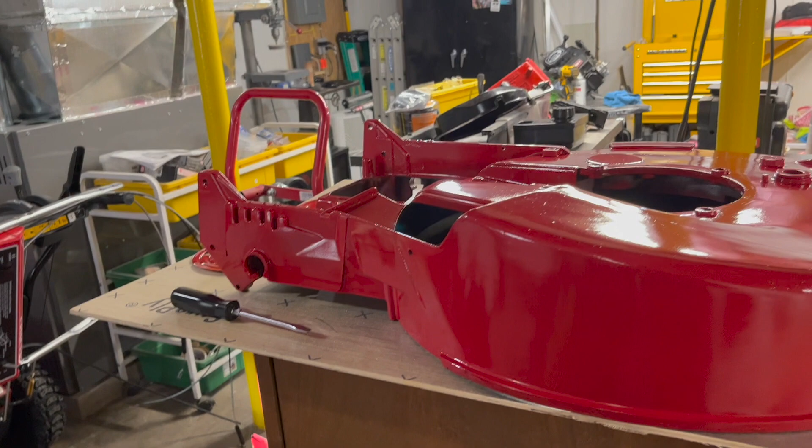Welcome back, everyone. So what we're going to be doing is, in this video, I'm going to be recording this over a couple of different days, and we'll be progressing little by little. At this point, every part needed either has already arrived or is on its way.

We've already painted the deck. Again, I used a product called SEM, a self-etching primer which comes in flat black, and that gave us a really nice bonding layer for the Rust-Oleum. Is it Carmine red I used, or is it something else? Let's see. But it's a pretty good approximation of the original Toro red.

It's called Sunrise Red, and that Sunrise Red I used on all the metal parts that were painted red from the factory. One thing I did a little differently is this belt cover - somebody had used it to put their foot on rather than on the step pad for starting the engine. What that's done is worn it heavily and scratched the shit out of it. So I painted it with a metallic plastic paint, and I'm not happy with the finish. I'm going to repaint this, but I have to sand it smooth again, and then we're going to paint it with a different color.

So this was originally red. I actually looked up to try to find another one of these that isn't scratched like this, but it must be a common problem with this mower - people use this as a step rather than right here, which is what this is for. So, hey, whatever.

In the meantime, I have the blade clutch bearing right here, and I'm considering replacing the bearing. It comes as an assembly, and this assembly is $80, but this bearing is still good. What I want to do is inject some fresh grease into it, just because I think it couldn't hurt.

So what we're gonna do is I got myself a needle for my grease gun - it's an injection needle. You just attach this to any standard grease gun, and you can inject grease into sealed bearings. It's sharp, a hypodermic style needle, and it can be dangerous.

So what I'm going to do is set up the camera here, and we're going to inject just a little bit of all-purpose lithium grease into this bearing. So let me find my grease gun - I think I had it set out right here. I'm going to pump some grease through it to make sure it can actually work, and make sure we're injecting clean grease and not some contaminated shit.

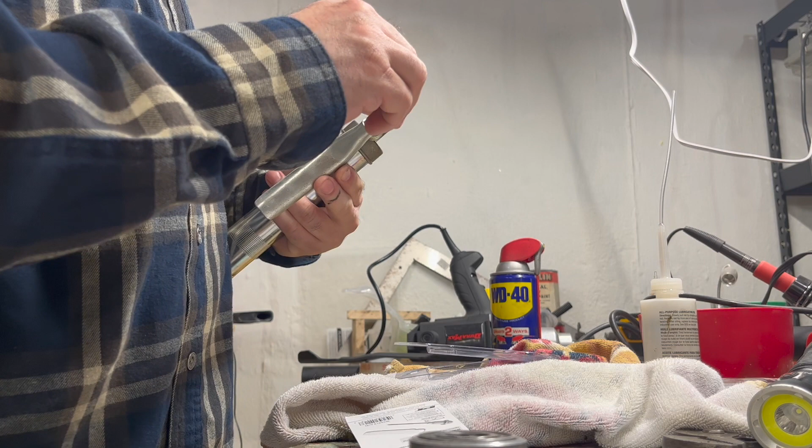Okay, yeah, that works. So we're going to affix this to the nipple, tighten that down, and we're going to take this and inject it right between the seal and the bearing inner race, just like that. And we're going to just pump a little bit of grease in there.

So this bearing is still good. I kind of want to keep it that way because I don't want to have to replace it. Once a sealed bearing starts to get rough, once it starts to otherwise develop problems, you can't save it - it's done for. But look at that, tightens it up nice. And after a few revolutions, that will spread throughout the bearing.

Now we got to do the inner one. There's two of them - two sealed bearings here. Just... why this part costs so much. We're just going to inject it in a few spots, and like I said, that's going to replace or replenish the grease.

Is this cartridge really empty already? That can't be. Almost.

Now, we could save this bearing, but I'd rather not, because I bought the entire assembly for $15. So there's no point in saving that one. Whereas this one cost $80 and the bearing is still good. So like I said, we just injected a little bit of grease into it to rejuvenate it a little bit. Ideally, we would take it apart and repack it, but I'd rather not do that. So I think we're good here. And after a few hours of use, this thing will be fully and totally rejuvenated.

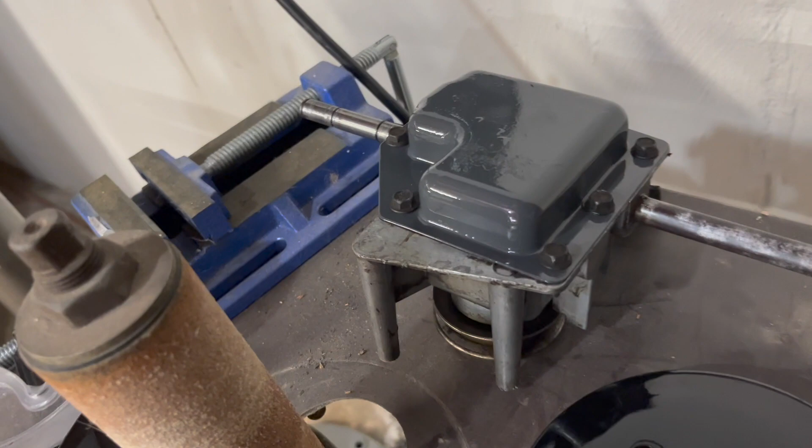Now we got to take the engine apart. We're going to take the top end off, and we're going to take the flywheel shroud off and the starter. But here's how the transmission looks. It's been repacked with grease. I put way too much grease in it, but that's what the unit looks like, all nice and assembled. But I really packed it in. It was making a lot of noise when you move the mower back and forth. So I figured it was probably due for some lubricant. So now we need to take the engine shroud off.

All right, we're digging in there. And we still got a lot of crap in here. To get to the crankcase breather, we got to pull the flywheel off. And this cup is full of stuff. But we have to get that hose replaced. There's no way around that. From what I understand, this all has to come apart. This is all coming from the crankcase breather.

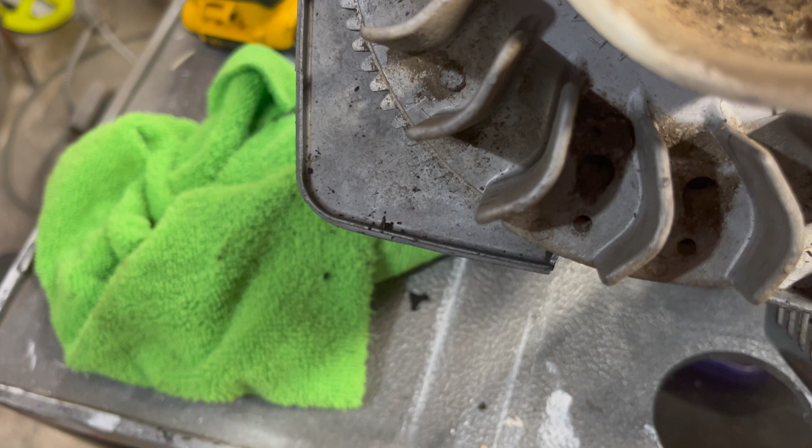But it looks like some of it could be from, it could be one or the other, or all of the above. So I need to verify the direction. I think this is counterclockwise. No, clockwise to remove and counterclockwise to install. And you can't really see much of the exposed thread, so I'll have to look that up and see what it's going to take. But I have that impact here I could use to get that off.

What a fucking mess. Look at all that oil that just dripped everywhere. It's just absolutely everywhere. So what's happening is the flywheel is blowing air down this way. So it's blowing oil and everything else down this way. It's just making a mess. So we gotta come up with a way to get this done.

Okay, I removed the flywheel nut. It is standard lefty loosey, righty tighty. That didn't put up a fight. Now I just need to get this flywheel off. To do that, I'm going to use a mallet and the closest thing I have to a breaker bar. I've been doing it like this for my entire life. I don't have my mallet in here, but I'll use this.

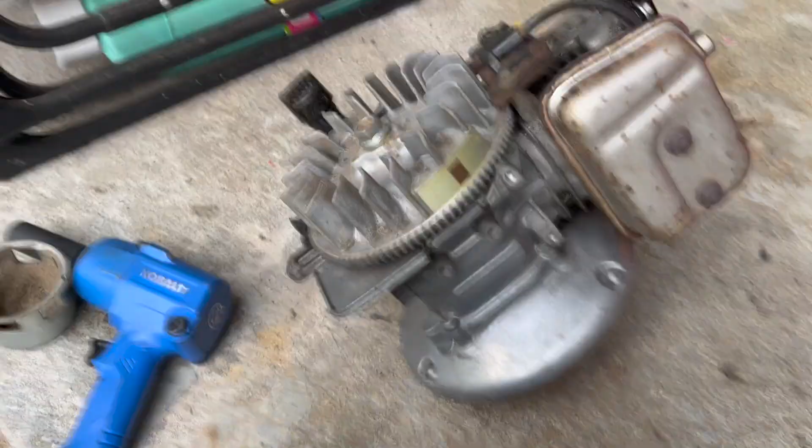So what we're going to do, we're going to put the nut back on to protect the threads. Okay, just like that. And we're gonna give it a good swift kick in the ass. So what I gotta do is put some pressure under the flywheel without breaking anything. This is an aluminum material, so we don't want to break anything. I'll put it over here. This usually pops them right off.

So I don't have a tripod for this phone, so bear with me guys. Here we go.

Just really break it free. It's easier when the motor's on the deck. Easier when the motor's on the deck, but we don't have that luxury, so yeah, this one's a little trickier because I don't want to break anything. I can see aluminum bending and I don't like that. There's gotta be a better way.

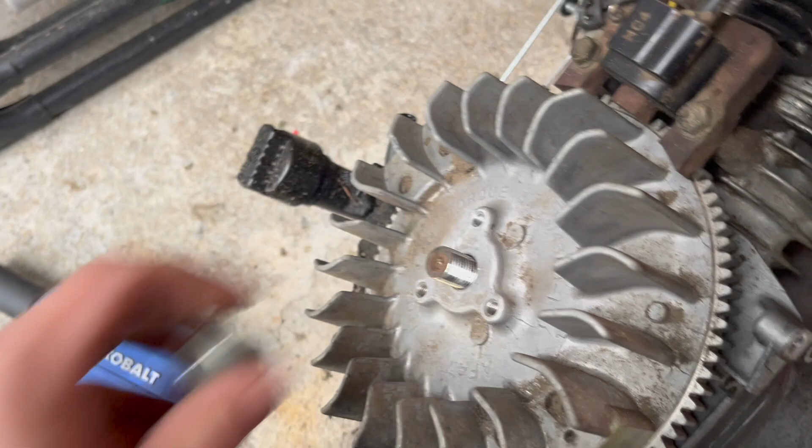Normally they don't take this much effort to remove, but maybe if I do it this way. All right, just took a few more taps, but we were on the right track, so we got it off. Oh, I gotta take this off, but we're there. Let's bring it down to the basement and finish the job.

So let's take a look. Yeah, you don't want to put so much pressure that this starts bending. You got to be very careful. It's not the funnest job in the world, but somebody's got to do it, right?

Now this just means that we're going to have to make sure we gap this correctly. I do have the... You know what I used to use as a kid, and this was taught to me by a long-time lawnmower mechanic. I would use a dollar bill to gap the magneto to the flywheel magnet. And it works every time.

So here is our crankcase breather. So that's where we got to really focus some of our attention. Oh yeah, this motor fits right in this little pocket. There's a wire thingy there. Anyway, so this is our crankcase breather. Look at how dirty this is. We're going to clean all this up. I'm going to get some of that foamy engine cleaner shit.

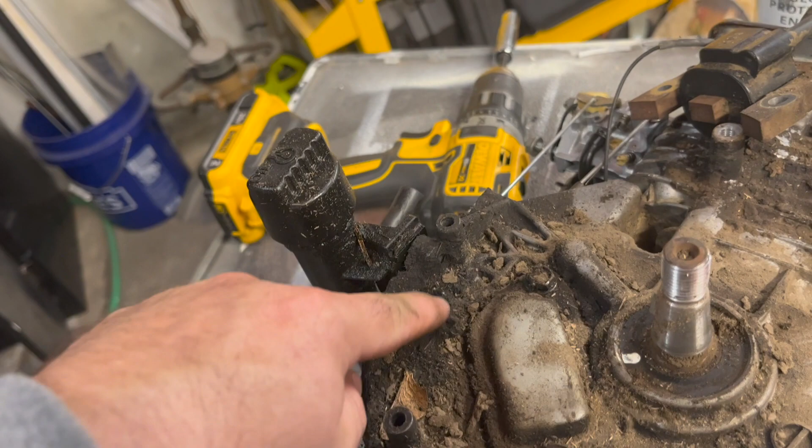And it looks like our upper seal might be leaking. But if you do the forensics here, it looks like a lot of this oil is actually coming down from here and then dripping down. But I do need to change out this hose, so I have to take this apart anyway. So it's not a waste of time for sure. Okay.

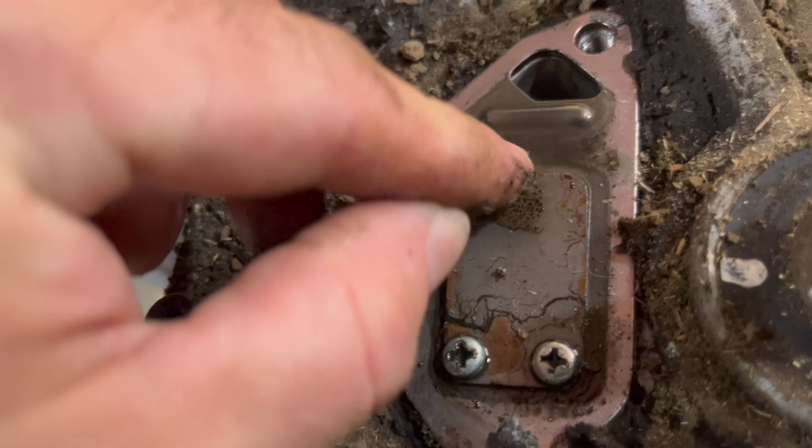Let's see what horrors lie under here. That looks really bad. Yeah, I'm gonna have to get more parts cleaner. This is just not acceptable. Okay. All right. Looks like there's a, yeah. Okay, I see where that hose goes. Let me clean some of this off first before I get any of this into the engine. So that goes straight into the crankcase. Don't let anything in there.

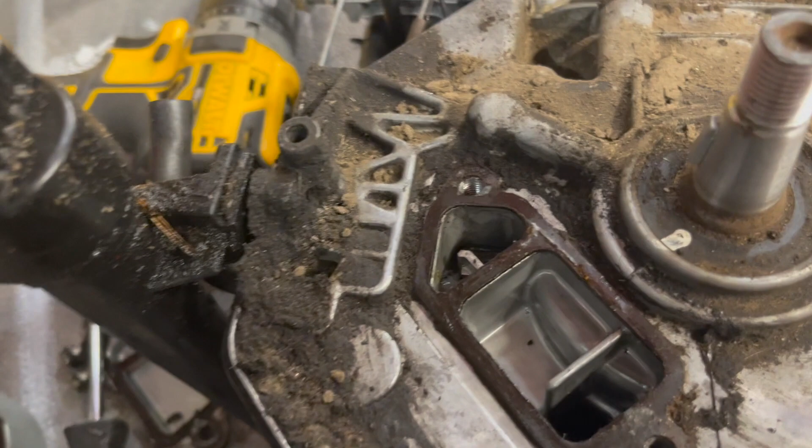This is another cork gasket. I'm gonna have to find a way to make a new one of those. Now that's actually a fiber gasket, but a very thick one. We're gonna have to reuse it, I guess. So here's our hose. I'm gonna pull this hose out. Somehow. Looks like it's swollen in there.

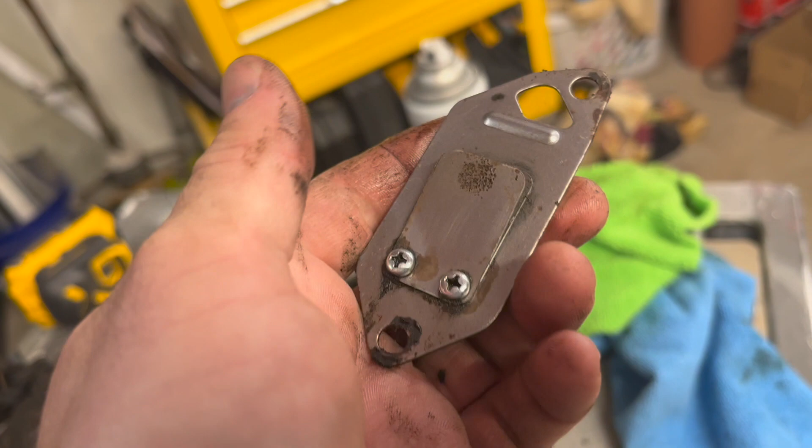But oil is getting into here. You can see there's a lot of oil in there and it's dripping around the hose. So we've got oil from multiple sources here. Here's the opposite cover. So it's got this little reed valve in there. We'll have to clean this off. So positive pressure is supposed to allow air to come out under that cover and into the breather, but it's allowing too much oil.

So what we're going to do is we're going to pack this with steel wool. I'm going to take a wad of it and stuff it in there. That's going to help hold some of that oil back. As for the hose, she don't want to come out. We need to replace this hose. It's done for.

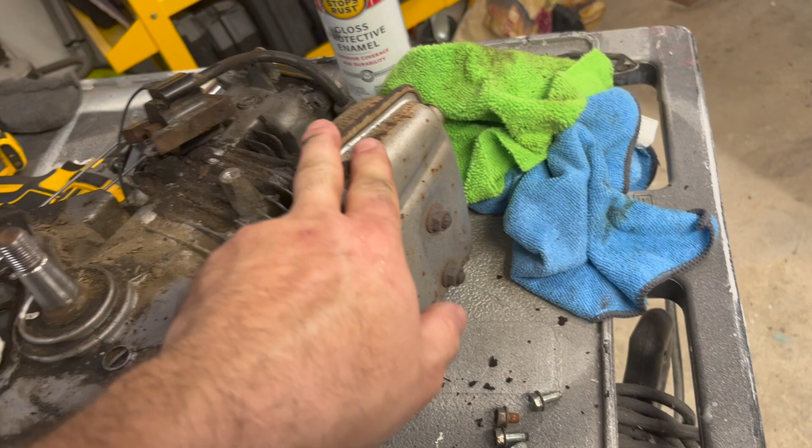All right, I just found a muffler gasket. Those were discontinued from the manufacturer. So when that comes in, I'll take the muffler off. We'll put it in Evapo-Rust, get the rust off of it. We're going to repaint the muffler black or whatever high heat paint I have.

The crankcase breather hose is no longer available, cannot be found. It is a special bespoke hose and it is full of oil. So here's our best bet. We need to stop the influx of oil somehow or slow it down. So here's my plan. I'm going to clean this up and we're gonna put some mesh in there, which is going to be in the form of steel wool.

And I've got some of the heavier grit stuff. This is what we're going to use, and that will slow down the flow of oil. Try to keep it from blasting out of there. So we've got a combination of factors causing oil everywhere: overfilling the crankcase, not being careful when putting oil in the tube and spilling it everywhere. We've got an oil cap that doesn't seal anymore, and we've got a poorly designed crankcase breather.

A lot of factors. Now we also have a possible bad engine seal here on the top, but I'm going to start with the cheapest stuff first, and then we'll escalate it. If we have to pull the flywheel off again and do the flywheel or the upper crankshaft seal, we'll do that at a later date.

I do need to do some cleanup here really bad. Once I get this cover off, I'm going to scrape away what I can, just kind of pick it off like an archaeologist. Yes. So because I can't get these gaskets anymore, I'm going to reuse the old ones, and I'm just going to seal them with RTV. It's really the only thing I can do at this point.

All right, so we're going to stuff some steel wool in there. And you're thinking, well, you think you're smart. Well, I do. But I try to think of things that may not be on the minds of everyone. Yes, it's possible that a few fibers could get sucked into the engine, but it's also possible and more likely that the steel wool could be blown into this reed valve and keep it from closing properly, right? That's a possibility, ain't it? Well, I thought about that.

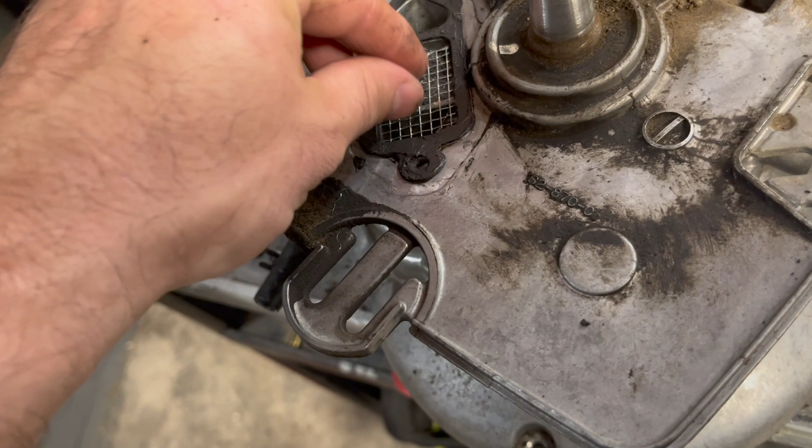So I cut a piece of hardware cloth to sit right on top of this, to sit right on top here. And that hardware cloth is going to prevent the steel wool from getting blown up into the valve, in theory. That's my theory anyway. We don't want anything down in this channel. The oil should be able to drain back into the engine.

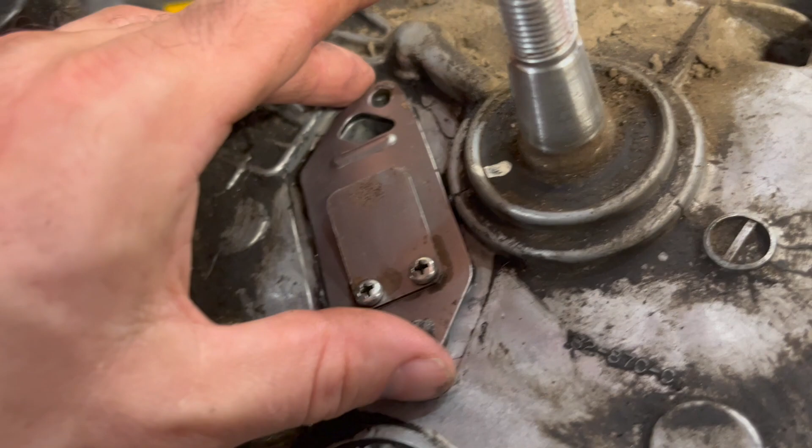This is how a lot of these PCV valve systems work in motor scooters. I've seen a very similar idea used in those. But the system that they implemented doesn't work very well to keep the oil out of the airbox. So consequently, oil gets everywhere. Everywhere we don't want it. So I'm hoping that my little hack here works.

So the hardware cloth is to prevent, during intake stroke, or when the piston is being drawn into the crankcase, that steel wool ball from getting shoved into the reed valve, which would cause some problems. So what do you think? Think it'll work?

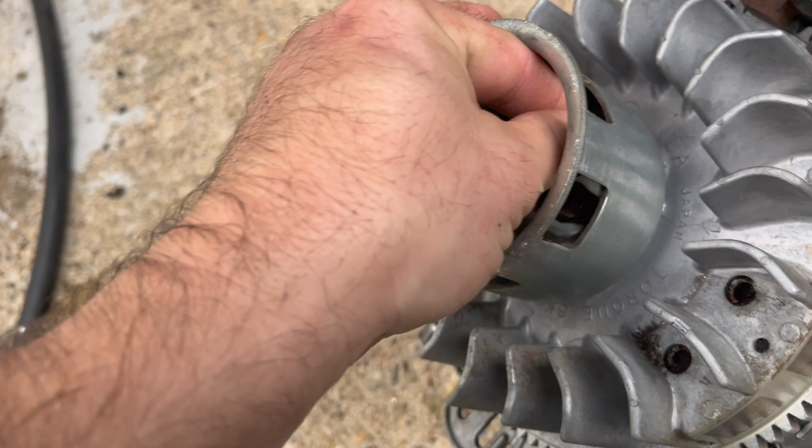All right, so we cleaned this up. I just used compressed air and a wire brush and just blew all the crap out. Anyway, so we got to get this cup lined up, put the bolts in, and then we'll impact the nut back on. I'm not going to waste my time with torque wrenches. I don't see any reason to do that. But yeah, so I think we're good.

We got the crankcase breather, I think, all sorted, and yeah, I think that's going to take care of it. I think a lot of that oil, again, is from just being not overfilled, but spilled over the years. So I'm going to chalk it up to that, and I think I'm right. We're not going to do full send, but we are going to give it a few love taps.

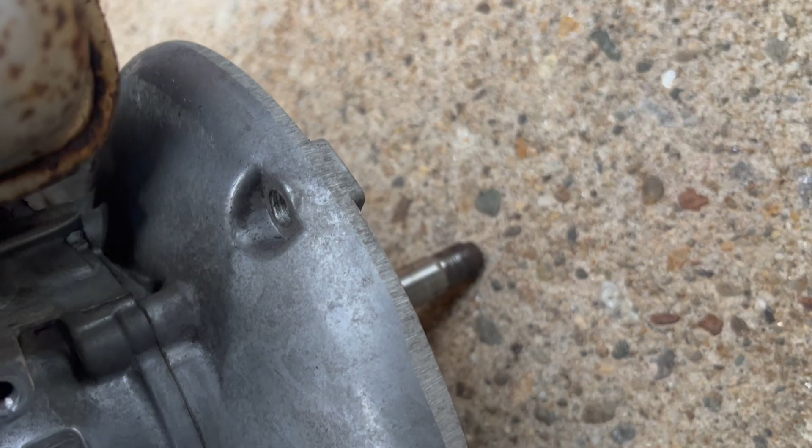You want to wait. You want it to ring. I do it by the ring. When it goes ding ding ding, when it stops escalating, that's when I let off. So that's just about do her. Okay, this engine's looking pretty good. Now the muffler has got to come off soon, so we're gonna throw some PB B'laster on these nuts.

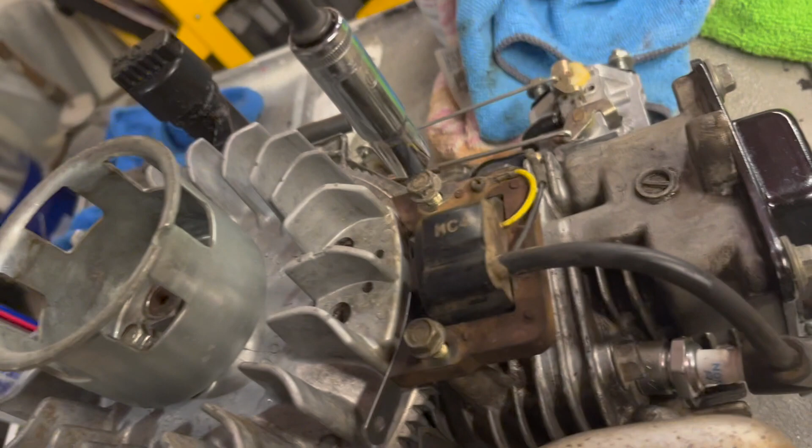Okay, so I've got a 0.38 millimeter feeler gauge, which is factory spec for the ignition. So I just need to find the bolts. I think it was these two. And we'll put that back together. That should do it. Should be correct.

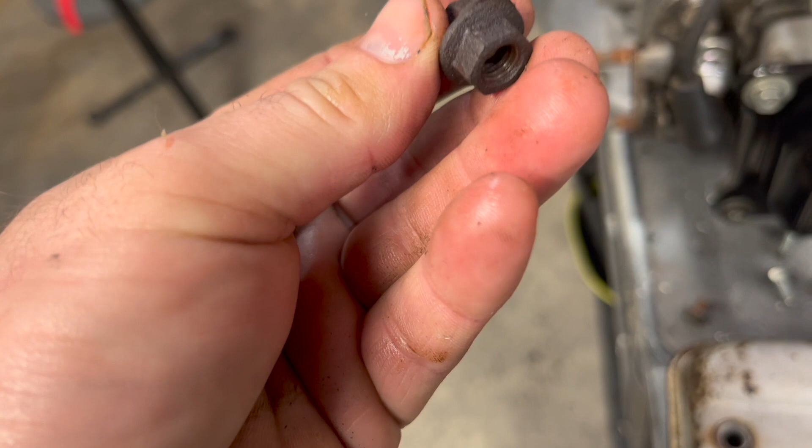All right, muffler comes off now. The gasket is on order. Let's take a look at the original one. Well, it wasn't leaking. You can see there are no burn marks outside of it, and it may even be reusable. But we're gonna just take this muffler and just dunk it in. And you know, these nuts didn't come off too hard. They were very, very easy to come off. So we'll just Evapo-Rust them because, well, that's cheaper than buying new ones.

You know, it never ceases to amaze me the levels that Toro took to hide the identity of this engine. Nowhere on this engine does it say Suzuki. It is completely just absent. There are no Suzuki stampings, logos, nothing on this engine. And it just really blows my mind.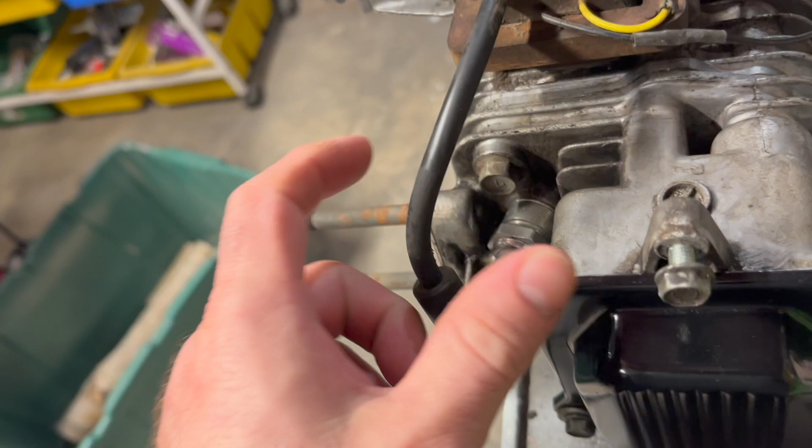But I bet if you pull the engine apart, it says Japan everywhere. Japan, Japan, Japan. And the parts that come for it come in Suzuki bags. Nowhere does it say made in Japan by Suzuki. It just doesn't. I find that not really frustrating, but you'd think there'd be a little S, that cool S logo that they have.

Nothing. In fact, the only thing that is marked is the carburetor. But they made sure not to put a model number for the carburetor, so you cannot cross-reference it with other Mikuni carburetors. A lot of effort was made to hide the source of this engine.

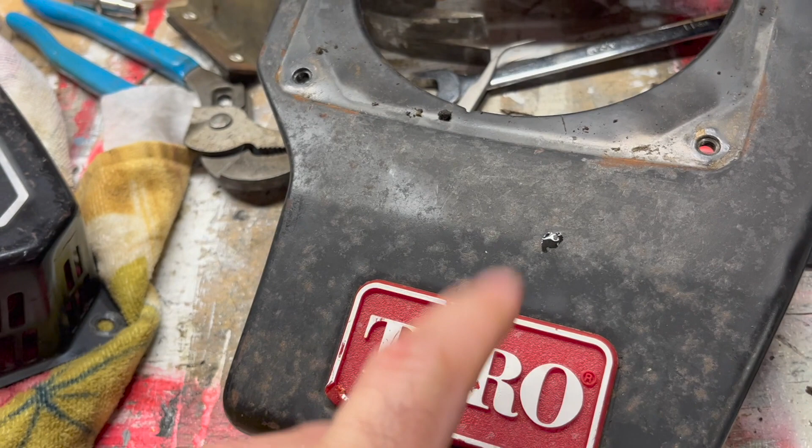I was kind of hoping that this Toro badge could be easily removed, but wishful thinking. It is not. I thought it was held in by double-sided tape or something, or a screw or a clip. But no such luck. I don't want to strip the paint off of this, so I'm gonna wet sand the cover. It's a little rough. We're gonna wet sand it, and we're gonna paint it with engine paint.

So I just got the engine shroud painted. It's about as good as I'm gonna get it. Again, I'm not looking for perfection. I'm just looking to make it look a little bit more presentable. As for the recoil, it is over here. And that came out just as well. I masked off the label, and we shot it with just black engine paint.

I'm probably going to put some clear coat on this. This stuff claims it has gas resistant properties, but that's only if it's really baked on, and we're not baking any of these parts. At least that's not the plan.

The parts delivery just came for today, so we got a factory Suzuki bowl, part number 1324587C00. I'm gonna have to look that number up because that could cross-reference to another carburetor, which could be a very interesting break in the availability of parts. But you can see how it's plated internally, and ours is no longer.

So, the old one. Let's compare them side by side. They could be the wrong part, you know. Would be my luck, wouldn't it? I like this makeshift engine stand I came up with. Let's take a look at these side by side. Let's see if there's any differences.

The only difference I can see is this is square and this is not. I wonder if that matters. But otherwise, it looks like they're the same diameter. Hold on. Yeah, it's the same part. Worth $67? I think not. So we'll just kind of put that in place. This is our drain screw.

Apologize for the poor camera work. I'm just filming with my cell phone these days, and I don't have a tripod set up for it, so don't worry. Anything that's of value, I will make sure to show you guys and gals.

All right, I am now putting the bowl on. The screw fits, and I'm gonna grab a ratchet, and we will cinch it down. Make sure this screw faces us, like that. That's how it came off. And just go ahead and tighten that guy down. Is it a 12? No, it's going to be like a 14 mil. It looks like a 14 to me.

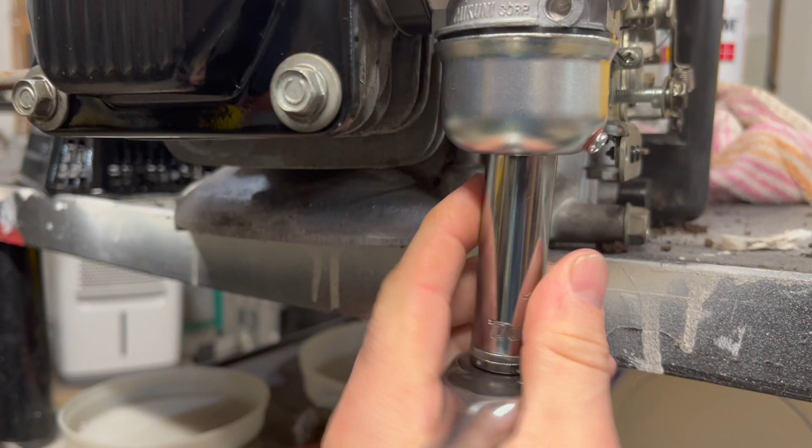So we're going to just slowly torque it down to compress that brand new bowl gasket we just got. There we go. Carburetor is done. Paintwork is done. Now this is still soft. We've got to give this some time to harden. So I'm not going to go nuts tightening stuff down over here until I could probably put the starter on.

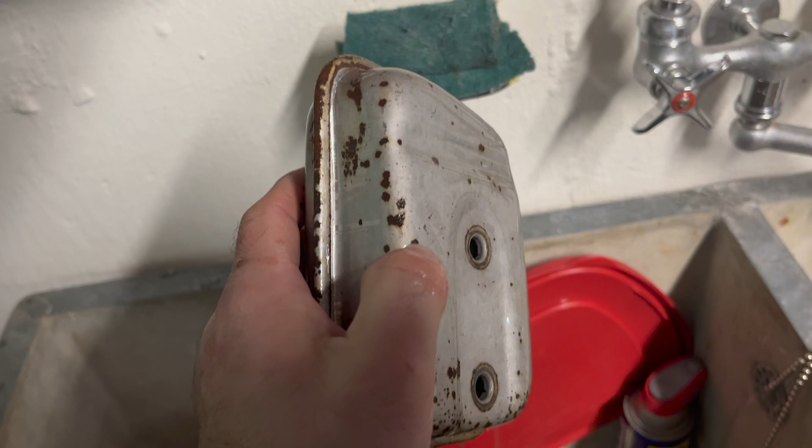That's totally doable. Hey, buddy. I got a bunch of parts on their way. Let's see how the muffler looks. You know, Evapo-Rust is usually pretty good, but it's just not touching the rust on this muffler. I'm going to have to take this over to the wire wheel. So we're going to have to go with a different plan of action for that.

Now, this is the muffler shield. It is fully derusted, so I'm going to wash this off and we'll dry it out. Okay, so we got our pulley, we got our belt, we got our new brake plate. So these all have to be put together. You get the idea. So I gotta find the brake plate, which I stuffed somewhere. There it is.

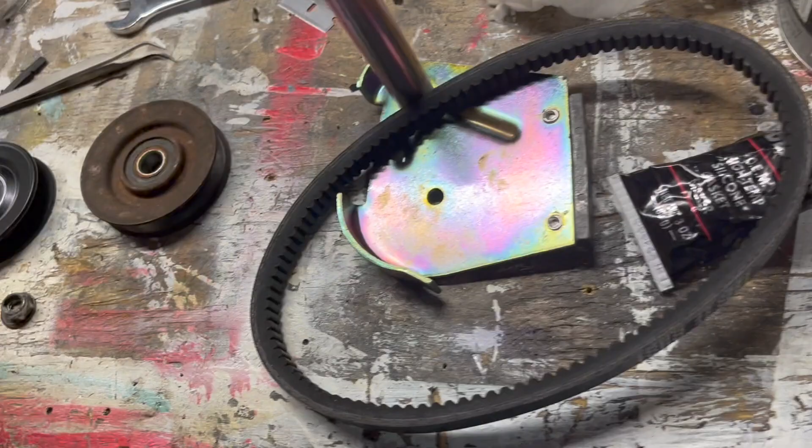So let's compare. Now this is an OEM belt, a Toro belt. And the one that we pulled off, I think, has been replaced. This belt is in far too good condition to be 34 years old, but it's the same size. So this is all going to go to plan. Put this on like that. Now our Evapo-Rust unfortunately has completely gone to shit, so I had to dump it, and I'm having to clean stuff now with a wire wheel, which is fine. There's nothing wrong with that.

I believe that this bushing goes at the bottom of the pulley. I think it's the same distance. Yeah, it should be. Shouldn't really matter which way we go with it. This way or that way, does it really matter? I don't think so. This pulley is made a little bit differently than the factory one. This is a knockoff, although that is a Toro part number, so maybe it is, maybe it isn't. Anyway, I don't think it matters.

But you can see that with these newer parts, you're already starting to see, not necessarily a decline in quality, but they're no longer using Japanese-sourced components. Which could be a personal preference thing, I guess. That should fit. We'll lock it down with the impact. Oops, I'm not using an impact, I'm using a drill driver. So this assembly is ready to go back on.

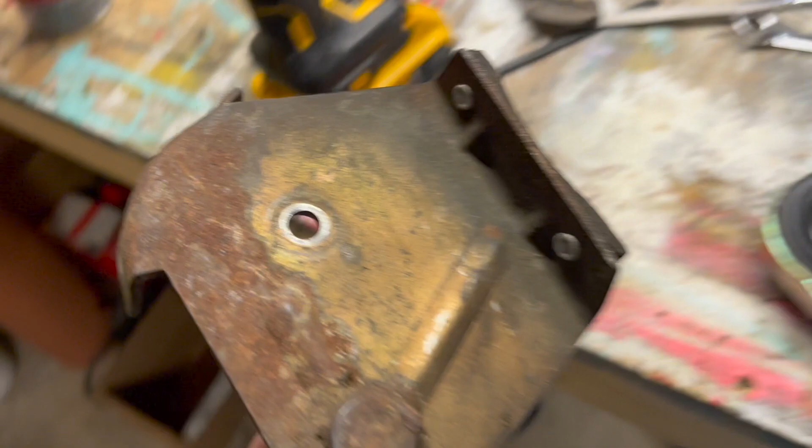Right? I feel like I did something wrong, like I put it together backwards. But if you look at the old one, clearly the pulley was on the top. Oh, I guess that's how it goes together then. I think we did it right. I had the bolt the wrong direction. It goes this way, and that actually can matter depending on the tolerances of the mechanism. There was a little bit of Loctite on this before, but I'm not going to put it on there. I don't think it's necessary.

I also want to cross-reference this part number. It's a little late for me, but may not be for you. This part number cross-references to an outboard motor and is readily available for 25 freaking dollars. That's the thing. I'm going to hang on to that. The part number that I had was for a Toro part, and I could find nothing else to cross-reference it to. You need to see the package from Suzuki, because Suzuki is not going to make one bowl for one machine. It's absurd. So they're going to use parts from other product lines, and that's exactly what they did.

Just like this pulley. Toro charges like $1 million for this pulley, but it's really just a generic pulley. It's used on a lot of machines from a lot of manufacturers. Nothing special about it. We can throw this one away now. You don't need to keep this. Since we're here, I'm hot tanking my muffler.

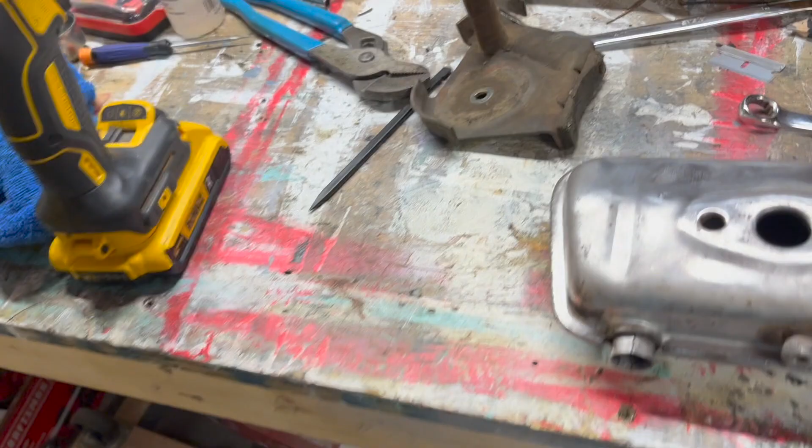I've done the best I can do with this muffler. We hot tank cleaned it with an ultrasonic mix, and I've wire wheeled it. The Evapo-Rust was a bust. Maybe that rhymes. Because the Evapo-Rust that I have is NFG. That's Latin for no fucking good. It definitely went bad, and that does happen. I need to heat this thing up to dry it out so I can paint it.

That should do the job. Let that do its thing for a little while, and in the meantime, we're going to clean some stuff up. Well, smoke started coming out of here, so we know we got it a little toasty.

It's still smoking, we'll let that cool off a little bit. I wanted to get the muffler hot so I could dry it, and it looks like I burned out whatever carbon was left in there.

I get the feeling this engine was running a little rich. Sometimes it's the little finishing touches that make the difference.

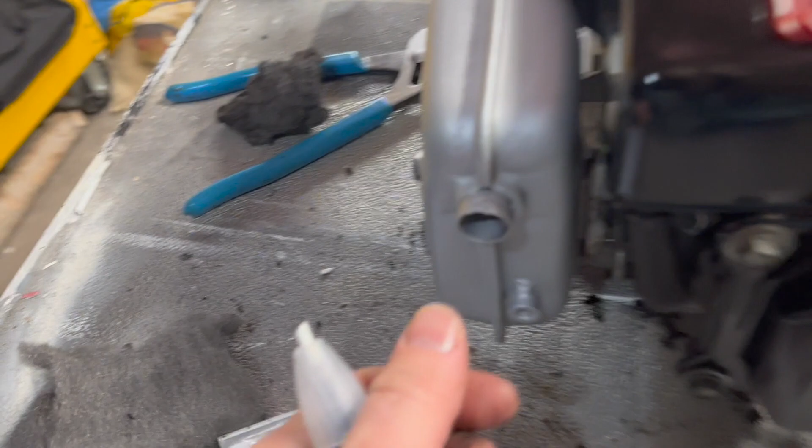Muffler is not bolted in yet, I don't have the gasket yet. So the plan is, once the gasket arrives, we'll mount it. Oh, look at how good this came out.

This is all just Evapo-Rust doing its thing, and that was it. After this, the Evapo-Rust has finally told me it no longer wishes to continue on, so out the door it went.

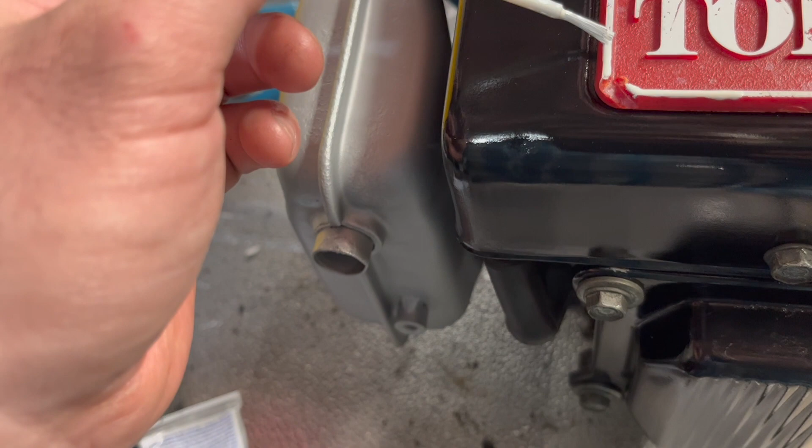Out the door I went. One bourbon, one scotch, one beer. I ain't seen my lady till I don't know when. One bourbon, one scotch, one beer.

That looks a little better. What do you think?

Anyway, so now we just wait. We wait for the rest of the parts. We wait for the paint to cure. We wait. Not much else to do other than wait.

So once again, I cannot emphasize enough how much of a ball buster this job has been, just because of parts availability and the lack of parts. I've got to reassemble these somehow.

All these parts I'm going to have to clean in the ultrasonic, and that's the plan. I can't really clean these - maybe I can. I don't want to attack those needle bearings though, don't think I can replace them. That's the problem, maybe we can flush them out.

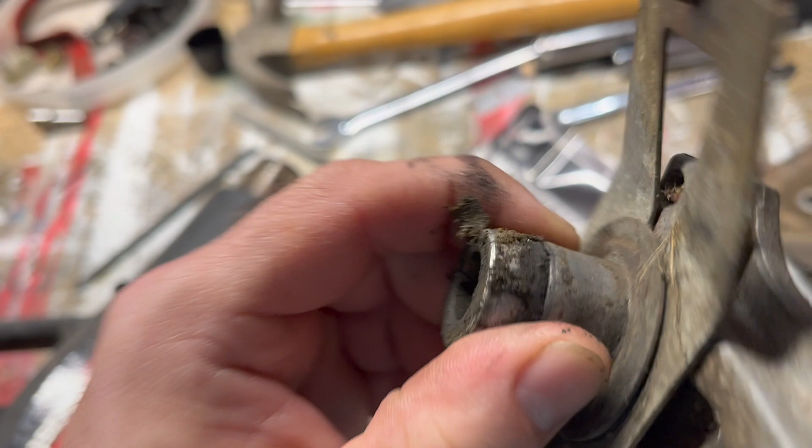I'll try one side, see how it goes, and then we'll go to the other side. But all the clips and little doodads and ratchet straps and nonsense - I got one of those bins for each side.

Oh yeah, I meant to cut a new piece of this. I think I have this exact diameter. This goes over the drive shaft. I believe the reason this is here is because it prevents, if anything were to touch it, it won't grab on to fibers and things in the lawn and wrap them around the drive shaft. It's actually a pretty stupidly ingenious idea, to be honest.

So now is a pretty pivotal moment. We're gonna now do the clear coat. Now this stuff is magic, it's really good stuff, one of my favorite products out of a rattle can. It's durable, chemical resistant, fuel resistant, scratch resistant. It's the best clear coat money can buy, and it requires activation.

What you do, if you just stick that on like that, and then press down like that - what that does is it breaks a capsule within the can, and you gotta mix it for about a minute or so. And here's the problem: once the can is activated, the clock starts running. You got 48 hours to use it. I've talked about this before.

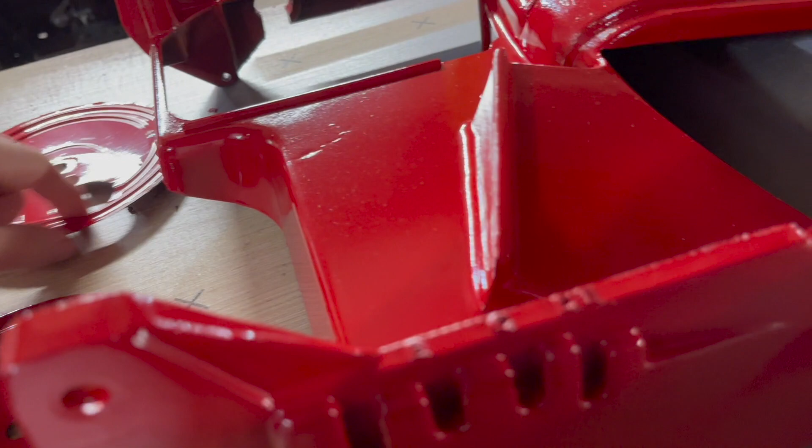Before I ruin this paint, I'm going to do the backer plates first. They were painted after I painted this, and they'll be our witness pieces. I think I did these wrong - that's all right. Oops, oh, I painted the crappy side of each one. Whatever, just noticed I did that just now.

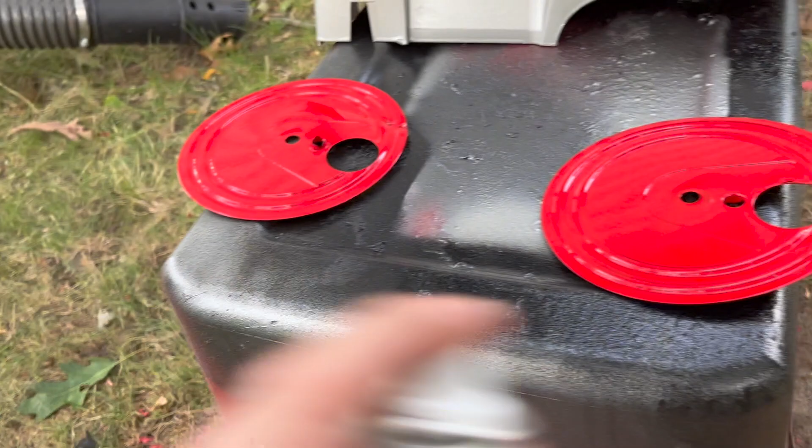All right, so what we're going to do is watch our pieces for - what's the word I'm looking for - you'll see the paint begin to blister if it's not mature enough. Here we go, because I've done this before where the base coat hadn't fully cured, and immediately it started to blister within a few seconds, actually within a couple seconds. As long as it doesn't blister, we're good to go. Okay, I think we're good.

Anything that's going to be touching the elements has to be cleared. Just dusty coats like that, that's all it takes.

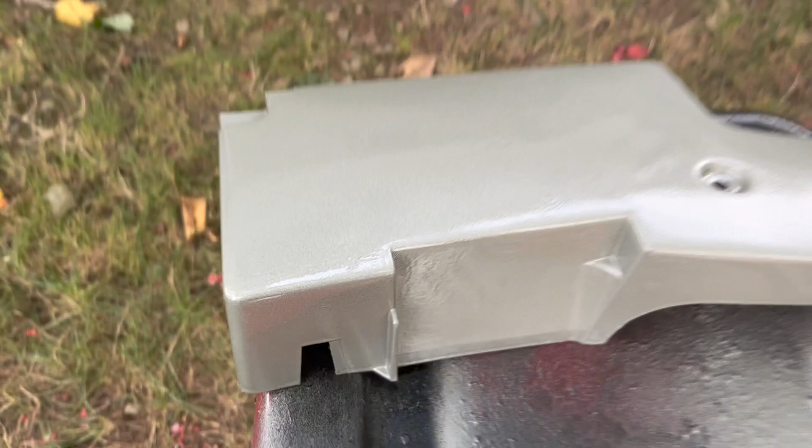And we're going to watch for blistering, because if it blisters, then we can't continue. We have to hold off and then buy another can. Now this piece had already blistered a little bit, but I didn't want to redo it, I figured it would be fine. Put one more coat on the backers.

Recoat time, just don't. It's kind of a bitch, but we have really good coverage. I think we're good, we can now proceed with the deck. I'm going to move these parts back inside. This step is one of the last. After this is done, we're going to let it cure for a day or two, and then we can proceed with reassembly. I'm so excited.

So I think I'll start over here and work my way around. Always keep a wet edge. Now the nice thing about this stuff is it can be buffed. It's that good.

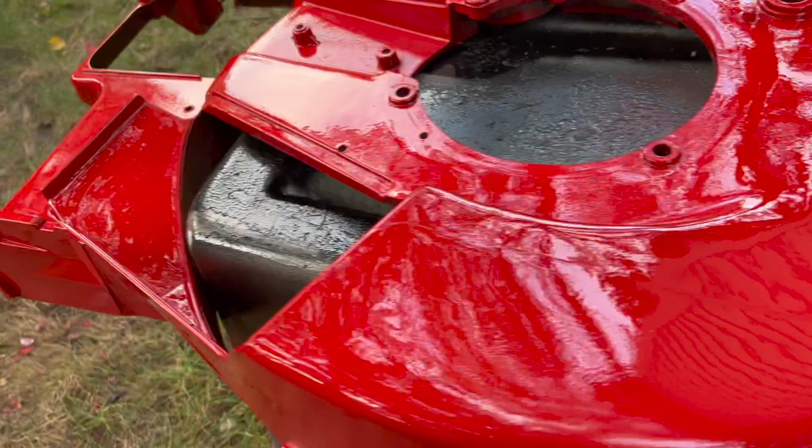Very expensive. Look at the gloss on that. And it will hold that gloss throughout the curing process. We got no blistering, really no contaminants. That's a pretty good paint job. Pretty good paint job, all out of a can.

Not bad. Now for the unavailable PCV hose, I had to makeshift some old, well, it's actually new fuel line, but it works, it fits. Now this is interesting because the way the hose is fitted to the engine, it's done... where did I put the original one? It was here just a second ago. I dropped some oil on the floor, of course.

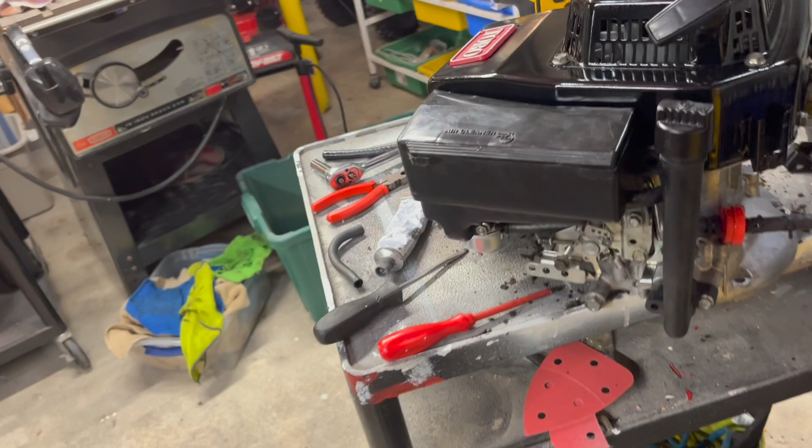So here's how the hose works. On the filter box side, it fits over a fitting. On the crankcase side, it fits into the hole and it's held in by compression. But because this hose has shrunken a little bit and it's gotten a little bit hard on the crankcase side, it was a massive leak. Oil's gonna get in that system, and where's it gonna go? The shortest route or the easiest path possible to the outside world, and that just happens to be through that hole.

I was able to shove a quarter inch fuel line in there, which is oil resistant, and it should hold. I was going to go out and buy some hose that size, but this is free. Well, already paid for, sunk cost. It's gonna be the phrase of the day, sunk cost.

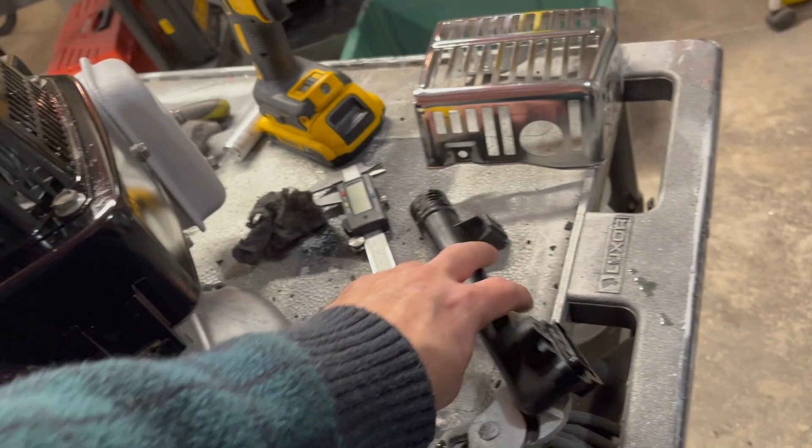Anyway, the oil filler, this is the new one, but I don't have the new gasket yet. So this is the old one. There's nothing wrong with it, I'm not going to throw it out just yet. But the new one's new, so yeah, whatever. We're waiting for the new gasket for that. That should be in this week.

By the time the rest of the parts land, I'll be able to assemble the engine and assemble the mower. It should be a one-day thing and done. One and done.

Our clear coat is now dry to the touch. Give it a few more days to fully cure. Mower deck looks oh so nice. Oh so beautiful, oh so shiny. I want to lick it. I want to put it on a stick and lick it like a lollipop. That doesn't sound right. Anyway...

Let's be honest though, this machine will be scratched to hell within just a few days of usage. And that's why I'm not going to worry so much about minor scratches and paint imperfections, because like I said, it'll be destroyed in just a matter of a couple of days.

You see it's brightly painted. I have put the pertinent information back. This is actually covered over in Gorilla Tape, which is basically a very heavy vinyl product. I love Gorilla Tape because it will protect this from the elements.

Sliding the gear train back in is the most tedious part of reassembly because there's a lot of parts to cover and not really any good drawings to show it. So you kind of have to do your best, I guess. So, far as I know...

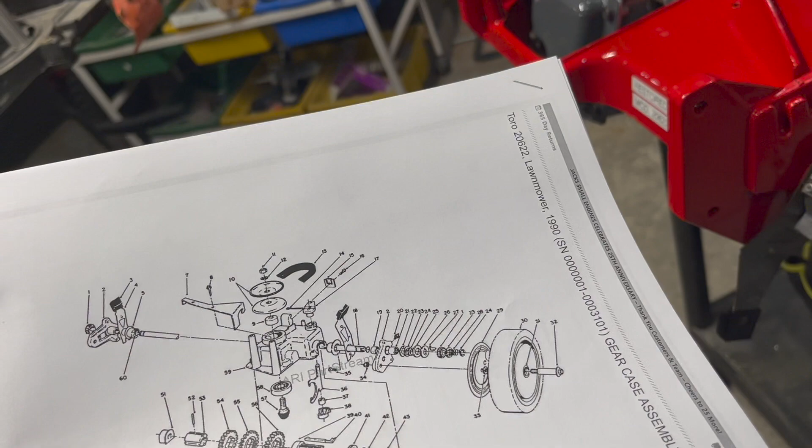The wheels, yeah, I think I've got these right. Yeah, you don't want to mix them up. That would be very bad.

I applied a little bit of grease, general purpose grease, on the axle shafts before I slid them in to kind of pre-lube that area. And the only thing holding these in... these just slide right in to the dropouts in the chassis, and they'll hold it in place before we get the washers and everything back in.

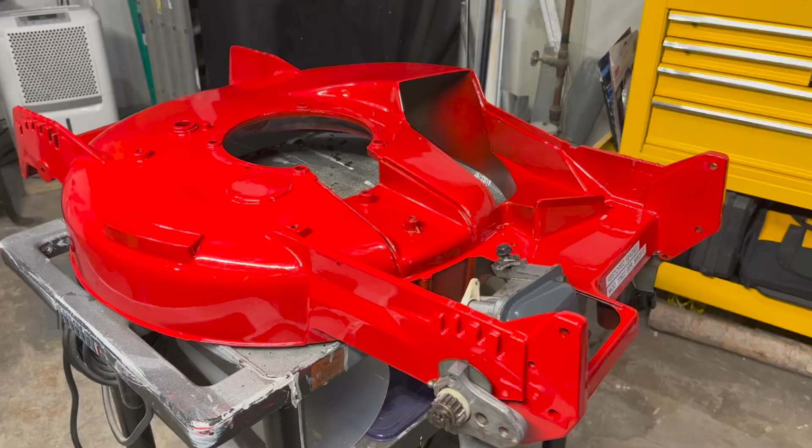All right, so I got the drive pinions installed. See how they freewheel right now? As soon as the drive shaft rotates, they lock right up like they're supposed to. And then once you pull the mower backwards, they free up. So when you're driving along and you pull back on the machine, even after disengaging the drive, if you pull back the handle, it's still engaged to the transmission until you push it forward just slightly to knock the dog clutches out of position.

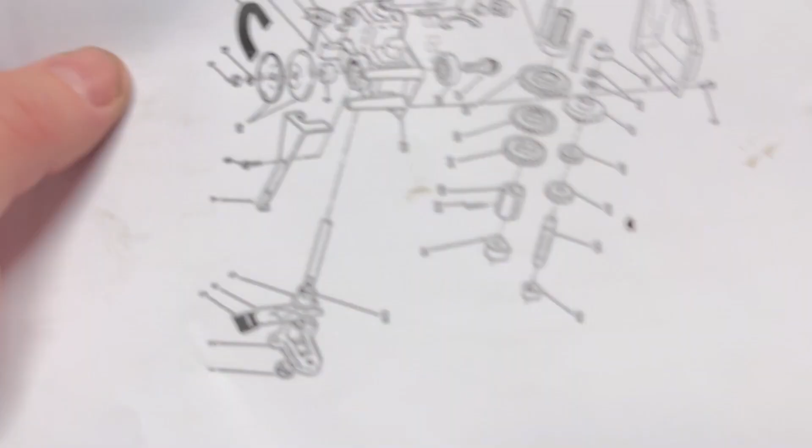I was actually kind of stressing out over this one because there are no clear instructions anywhere on how to assemble this, there's a lot of parts here. There's a lot going on in this assembly, and if you look at the blow-up diagram, look at all those pieces. Each and every one is unique, and in the case of the dog clutch, it's specific - it's not a dog clutch, it's a rocking key, but it's specific to the side that it's on. Everything else is universal - the gears are the same, clips are the same, everything else is the same.

But it's a fairly complicated assembly, and I was kind of stressed out over it because when I took it apart, it's not like I could take notes because everything was caked in grease. Old grease, which is the worst kind.

So what I'm going to do now is go ahead and do some satisfying lubrication of the assembly. I'm going to squeeze a little bit of grease on each side with my grease gun, and we'll make it all greasy. You don't want to overdo it. I only applied a dab of grease during assembly, but I didn't feel like I needed a whole lot. That should be enough, that should be more than enough, actually. Got those needle bearings all nice and coated.

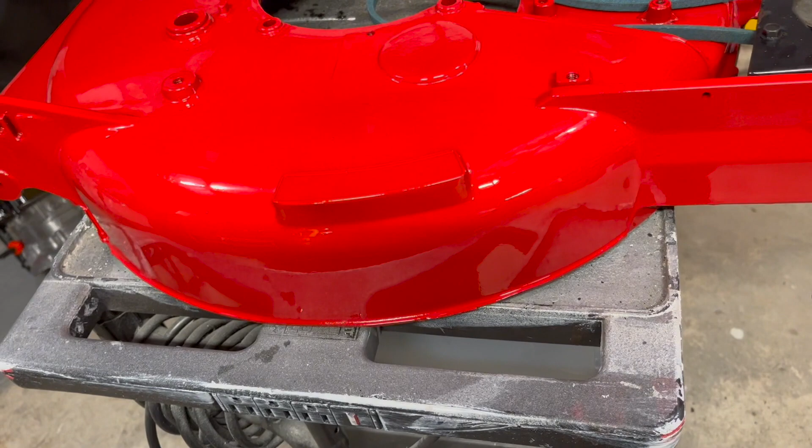Well, I got some assembly done. We got the gear train back in, the belt, the support bar. This is the bar that gets pulled to engage the drive, even though it still has a neutral position. Everything seems to be fine here with these gears. I got to keep these in the downward position so that I can get the wheels on - that's where the nuts get slid in for the axles. I don't even have wheels yet, I have the old ones but we're not using them. I got the grass catcher attachment - just little things I can get off the bench to reattach to it. I've got a decal coming for this. And so far, she's looking like a lawnmower.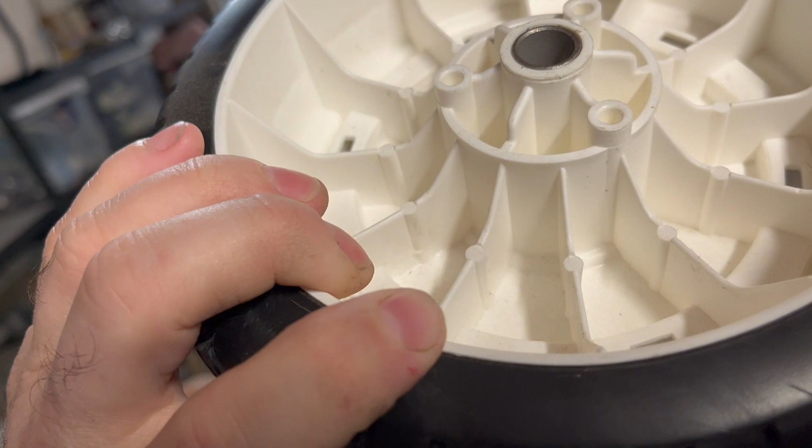Front and back, I got the handle bolts, or the handle nut things, and I'll have to clean these up after they're put on. We got to put some grease on these. We got the front wheels and the back wheels. Now let's compare the tread - 34 years of usage versus, now you got to use the drive wheels as a comparison. But see, they're not really all that bad. They're worn, but not that badly, just a little bit of worn. But I figured, you know what, we're dumping a million dollars into this thing, so why not a couple more hundred, huh? The wheels for the complete set of 4 was $100, and again, they are OEM wheels.

Is there anything else I ordered from this guy? Okay, so here's our O-ring. So it turns out that seal, that O-ring, is actually for the oil pump. So I figured I'd go ahead and change it, but it has a real oil pump - like, no joke, this is a real oil pump. I wasn't expecting that. And you wonder why these engines lasted so long, whereas their American counterparts from Briggs & Stratton and Tecumseh, they just depended on splash lubrication. But these Japanese engines, they had real, honest-to-God oil pumps in them, pressurized lubrication. And that's why these engines are built so well, or why they're lasting so long.

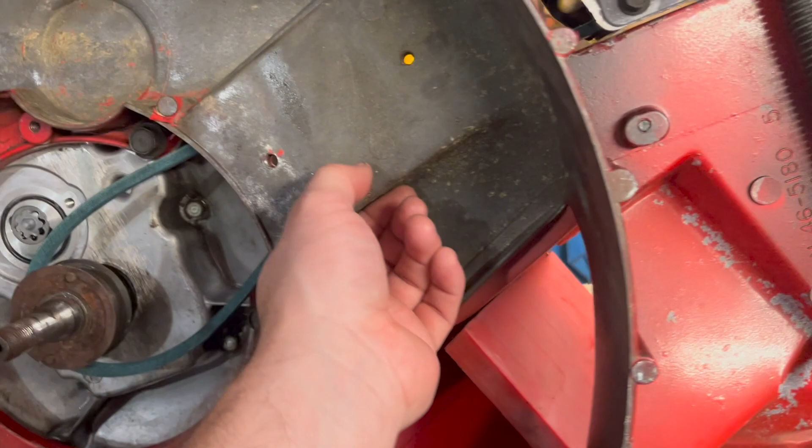One problem I have here is the belt is too big. I have the wrong drive belt, because at this point it only engages when this thing is pulled way back like that.

That's not correct. It is the wrong belt, so we cannot continue assembling any of this until we have the correct one. I might be able to put the whatchamajigger back in, but other than that, I can't go any further. We'll just do the wheels at this point and get the height adjusters. We'll do the wheels, maybe start putting the handle together, but we need to get the correct belt.

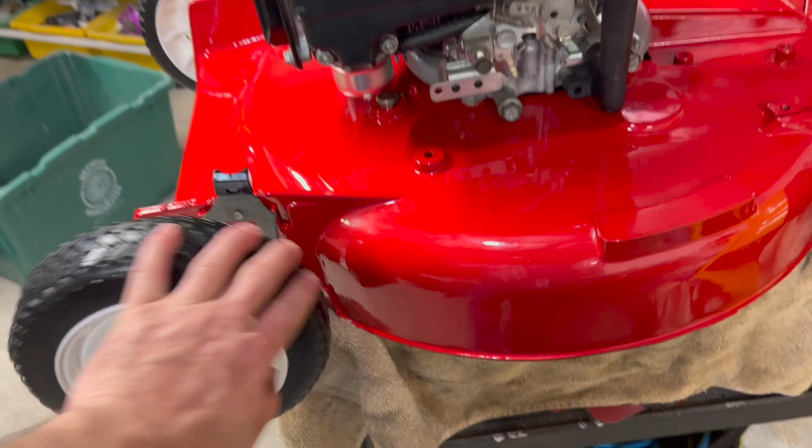I do not have the original belt. I think I tossed it. Well, we got wheels. Look at that spin. Huh? You like that? Man, it spins forever. That's how your mower should work. You know, things should be greased and lubricated and smooth.

Anyway, we need a new belt. Again, I still have the blade clutch belt, which is the correct size. I know that. The old one. But I don't have the old drive belt. So I think what I'm going to do is cross-reference this part number and maybe I'll get an OEM belt this time.

I don't know. This belt is too short. Too long. It's too long. And because it's too long, I can't continue the assembly because it's like the first thing you install. Once I have the blade clutch drum installed, then I can install the rest of these parts. But that can't be done until I have the drive belt. It's a whole big thing.

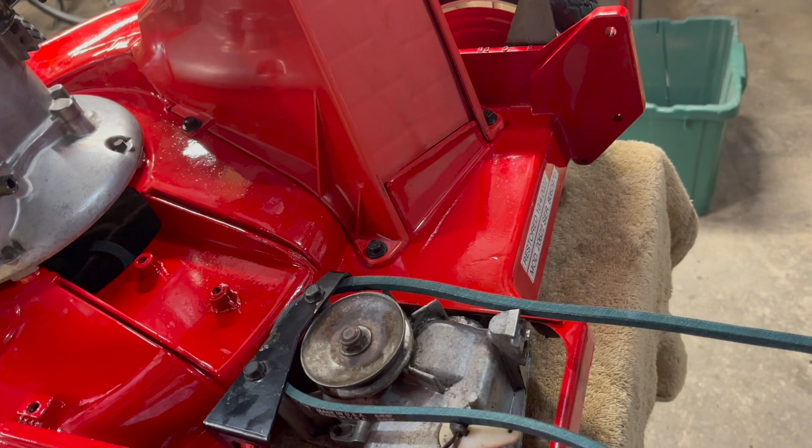Still need the dipstick tube seal. Got the oil pump seal replaced. But slowly but surely she's coming along. I think I'm going to start putting some of the handle parts together. I think we're in a good position to do that. But yeah.

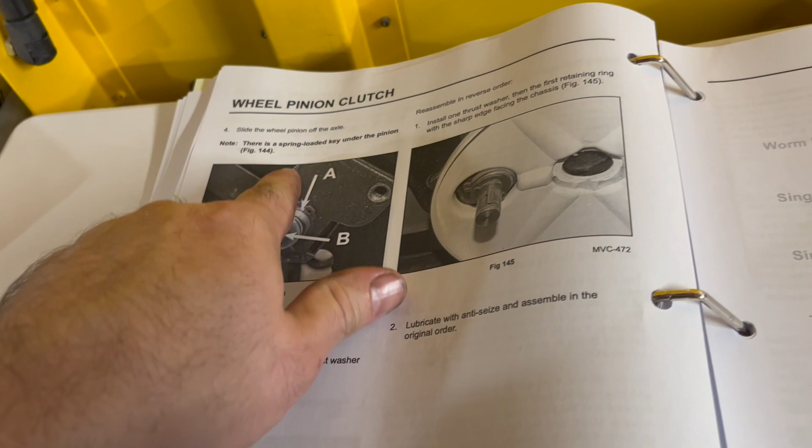Now the gear noise, that's normal. I don't believe you're supposed to grease that ring gear right there, or that drive gear. I think you're not supposed to grease it. And yeah, the pinion gear. Wheel pinion service. Remove wheel bolts. Slide pinion off. Okay. Lubricate with anti-seize and assemble in the original order. They're talking about the actual clutch. But I don't believe you're supposed to grease that.

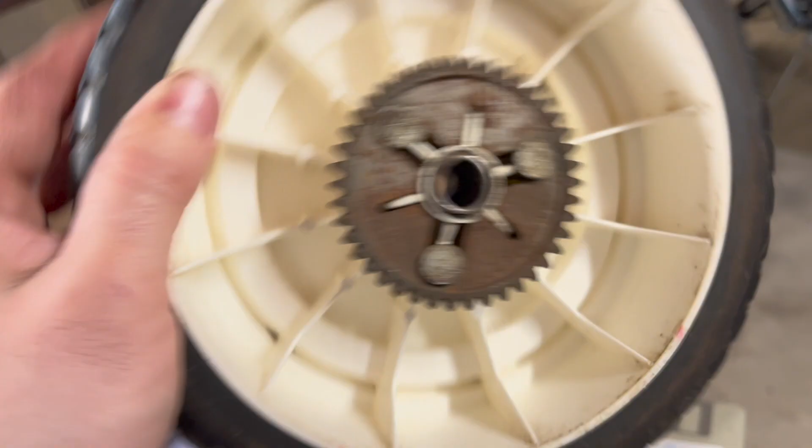Grease with number 2 lithium-based grease. Use a hand grease. The grease is for the grease fitting. But I don't believe you're supposed to grease the pinion gears. In fact, look at the original ones and see if there's any lubricant. No, these are dry as a bone. So I don't think you're supposed to grease those. The old wheels can be tossed. I'm not going to reuse them for anything.

But you get to see kind of what it's going to look like. It's coming along. Got the danger decal. Got the serial number all recorded on there. Model map, all that. Everything's there. And this Gorilla Tape will protect it. Gorilla Tape should not be looked upon as a duct tape or a packing tape. It's serious stuff. It's seriously good stuff.

Well, I did some homework and it looks like this is the correct size belt. It's a 35-inch belt. I just don't like the way it rides on that pulley. It just doesn't seem right to me. I don't know, but it does seem to be the correct size. The application, I don't know. But I got the cables all adjusted. Used my electric drill to confirm that it hits all 3 speeds and neutral.

But honestly, it blows my mind because it shouldn't hit the belt like that. Maybe it was designed to. But 35 inches is the correct size. So, say that. Well, so we've got the drive system all set up. That means we can now assemble the underside. I'm gonna go out on a limb here and say that this is okay.

I don't like the way it hits it, but it's not rubbing anywhere. Well, it seems to be rubbing a little bit onto this post. But if you feel, this post has wear marks on it right where the belt rides. So yeah, I'm gonna say that's correct. We didn't change any pulley diameters or anything weird like that. So you got me. So I'm gonna start reassembling the underside of the deck.

We've got the handle all put together. I mean, we're pretty much almost ready to rock. That's looking good. It's all looking pretty good. All right, so we started assembling the blade brake clutch assembly. You got to put this on with an impact. And there's no washer or anything there, which is kind of strange, but it's the way God made it. So we're gonna leave it alone.

This is all set up. This is all in place. We've got our belt on. There's a belt guard that goes, oh no. I think that belt guard goes in first.

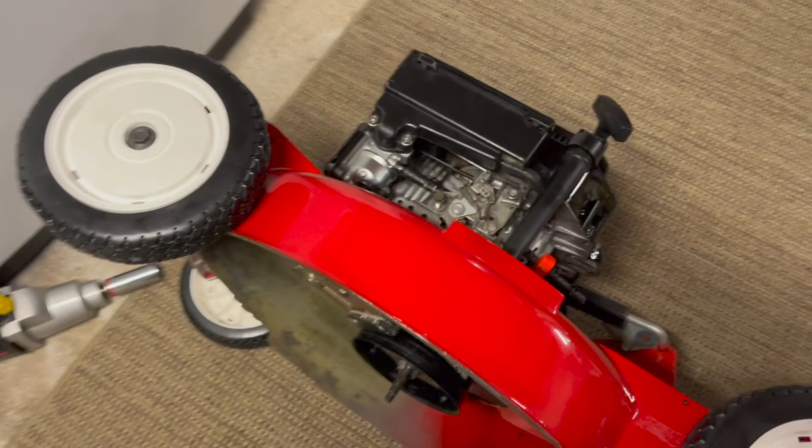Damn it. All right, one of the most difficult tasks to do during reassembly is getting this linkage all set up correctly. So the deal is you have to push this in with your knee while getting this bolt lined up with the hole in the pin, threading it in. It was a bit of a nightmare, I'm not going to lie. But I got it done, and that's it. I gotta double check the hardware on that other one.

One of the key things that you need to know is this link has to be in that arm before you put it in, because you won't be able to get it in after the fact. During normal overhaul and belt changing, I guess you really don't need to take that apart again. So that will never have to come out again.

And yeah, there's enough brake pad material here. It's all brand new, so this is all going to wear in nicely. This is the newly revised part. You can see it rides a little higher on the drum. That's just how it works. All right, we got the brand new clutch shroud to protect it from debris. We've got the blade, brand new blade. That goes on like so. And you've got the scalp cap.

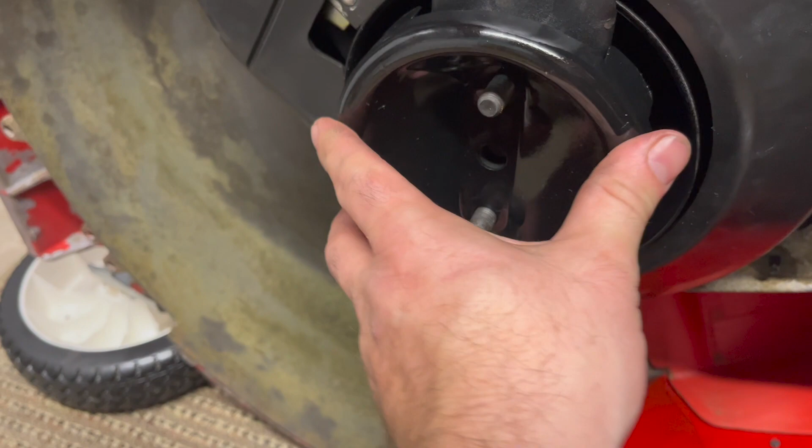Now I thought there were washers somewhere in this mechanism, but these are actually not them. So no, we just have these nuts. We got these nuts, and we're just going to go ahead and ram those on with a 5/8. Nope. Is a 9/16. I'll have to torque them by hand. This drill is not an impact, this is just a drill, so we'll have to tighten those with a ratchet.

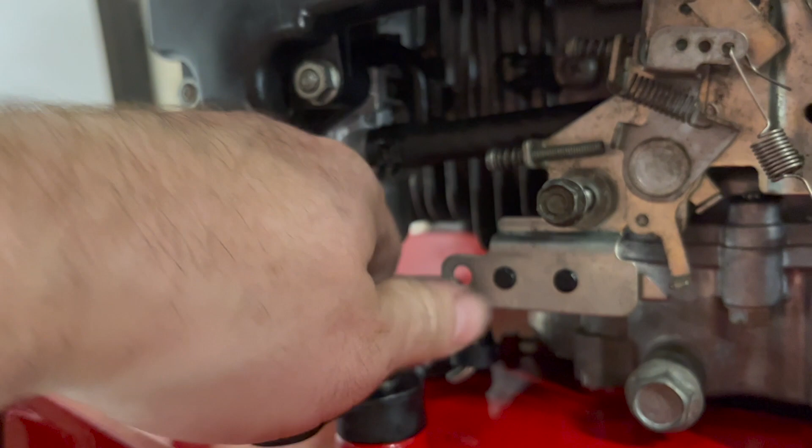And just like that, we're done with the reassembly of the blade clutch and the drive. We're just waiting for a few engine parts, and I need to send this guy home. So I'll do that right now. Again, I thought there would have been a washer on this. In fact, I think there should be. Because it doesn't look too cool. And that bolt is hideously long for the job, but that's what it takes.

So this is our throttle. I have to figure out how that was routed, because I'm not 100% sure on that one. I've got a threaded post here. It looks like something goes here, and I don't know what, if anything. Although the cover, oh, I may have answered my own question. I think the cover actually threads into that hole. Yeah, and that checks out.

Let's just test the blade clutch, see if that works. Can't run the engine right now. I don't have it fully assembled, but it rolls nice. Watch out for random objects. Okay. So if I pull this in, the drive engages. Of course, it can't because the engine's not running, but the belt tightens. Now if I pull this down, it pulls in both the blade clutch and the drive, and it releases.

So if you just want to drive it, just like that, if you want the blade to run, that does its thing. If you don't want it to drive, this goes into neutral, it is in neutral right now. I may end up replacing the drive selector cable. That seems to be pretty worn out. But that actually comes as a complete assembly. The cable itself is not replaceable outside of this assembly, so you have to replace the entire switch, which sucks.

But anyway, so I did scratch my handle, but that's okay. I'm going to be wrapping this with handlebar tape anyway, so that was always the plan. But the handle looks good. Let me just hold this over here. And she's almost ready. I'm going to be needing this thing to clean up leaves. I think it'll do a better job than that thing. So we'll have to get it going soon.